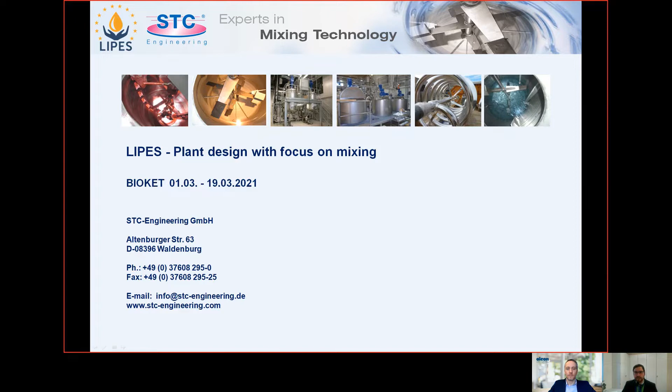My name is Patrick Jobst. As Jan told you before, I'm a project engineer from STC Engineering based in Germany. In this presentation, I will show you what we as STC Engineering do during the LIPES project. Our main focus was the design of the demonstration plant, and we were part of the people who were responsible for the general plant and equipment design. As specialists for mixing equipment, we are focused on the development of the necessary mixing equipment during the project.

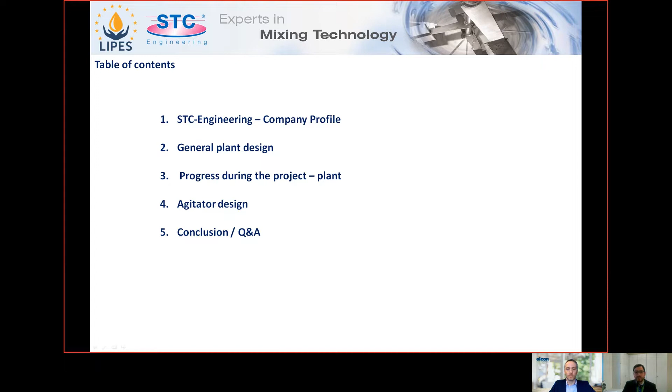So the table of contents for my presentation: in the first part, I will show you what STC does and what our specialties are. The second part is more or less the key part of the presentation. I will show some details about the general plant design. The third part of the presentation is a travel through the past of the project till the present status of the plant. I want to show you how we changed the character of the plant. In the last part, there are shown some parts of our ideas for the agitated systems in this project.

The STC Engineering GmbH and engineering company was founded in 1995. It exists as two companies. One is the engineering company. It was founded first, and later we founded the GmbH for the delivery of hardware because the customers wanted this from us. The central focus of the company is on mixing technology, and together with all employees, we have an experience of more than 30 years in mixing technology.

Our main field, where we are strong, is heavy mixing units and special agitators. And we are able to deliver the agitators for most mixing tasks worldwide. And we are also able to engineer and deliver customized skids and small plants. Here you can see it: the agitators, the vessels and reactors, mixing machines, and also package units.

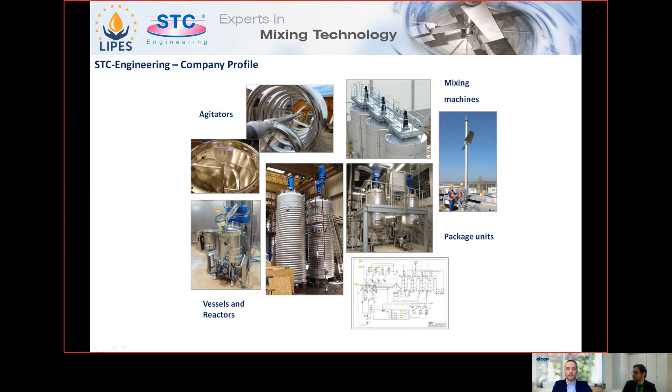For the LIPES project, our main part was the engineering. We have different fields in engineering, and one of them is construction and process design. For example, we can do the agitator design, the general plant design, mechanical design of vessels and agitators, or different design parts for plants, for example, piping and pumps. Another field is the risk analysis.

We are able to do vibration analysis with the finite element method, some load analysis, or for example, wear and tear analysis. We are also able to perform video animations, for example, to show the procedure of assembly and disassembly, do collision considerations, or do the visualization of stress and vibration. We are also able to elaborate technical documentation, for example, for the ATEX or the CE conformity certificate. Together with partners worldwide, we are also able to provide certificates for worldwide application and standards.

The last point is that we can do some tests. We are able to perform tests in our own small laboratory setup, or, depending on the project, together with partners, for example, the University of Applied Science in Köthen, Anhalt, Germany. The tests that we can perform are, for example, performance tests or mixing time tests, or tests to determine the perfect impeller selection, for example, for applications in stirring of solids or dissolving. That's not the only part of our service, but that's the most relevant part.

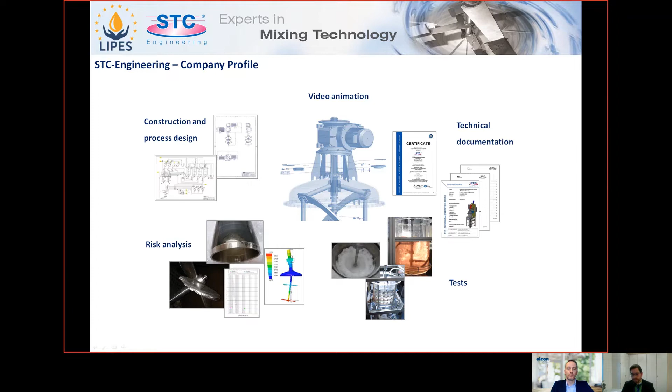So after that, I will come to the general plant design. The picture you see is not the status at the beginning of the project. It is more or less the final plant design, except the latest changes. We designed the plant together with our partner Oleon according to the basic requirements of the process. We use the existing small plant to show how the process works. To extend the place for the plant, we used an area outside of the plant building to integrate a storage area. You see it here.

The storage area is for handling the whole process in this one-reactor plant design to guarantee a 24-hour process for demonstration. The membrane unit here is for separating the enzymes after processing from fluids inside the process. The enzyme preparation is for generating a solution with the enzymes to transfer them through the process. You see it here in this corner. And the main demonstration reactor here, with a size of approximately 4,000 liters, is the heart of the plant. The enzymatic process takes place in this reactor and generates the product. There is a central piping route between main reactor and storage area to guarantee the necessary flow of all equipment, here at the back. In the next slides, I will show some details of the plant.

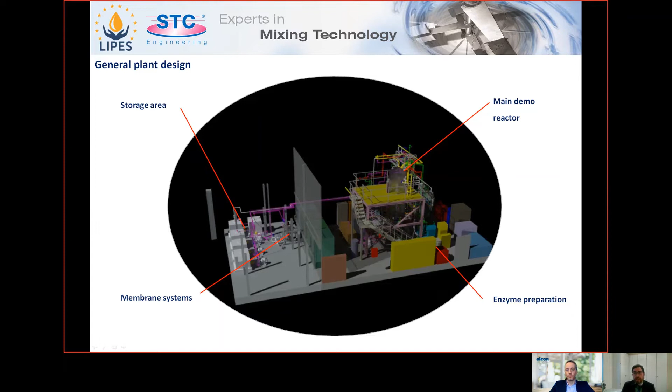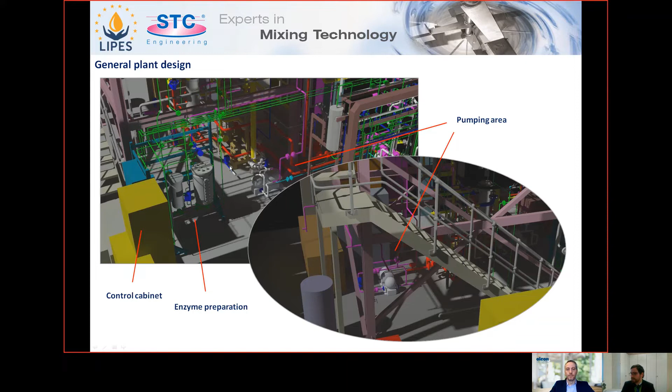The pumping area below the main reactor is for guaranteeing the transfer between main reactor and storage area. The transfer between enzyme preparation vessel and main reactor will be performed by pressurized air. The difficulty for this step was the integration of the equipment into the existing plant to guarantee that the space for the equipment is enough. See it here, here, and here, the enzyme preparation pot.

The storage area manages the main fluids of the plant and provides the input for the main reactor. Additionally, the output of the reactor will be stored here and can be transported easily to the next process steps at the other partners for the plant. Also, the membrane unit is placed at the storage area due to the limited space in the existing building.

The membrane unit owns one of the main topics of the process, to guarantee the recycling of the enzymes and to use these enzymes again for the process. The membrane unit is able to have an internal circulation loop or to be part of the circulation from the whole plant. Here you see the membrane unit, here the storage tanks and the pumping skids, and here the piping route into the main building.

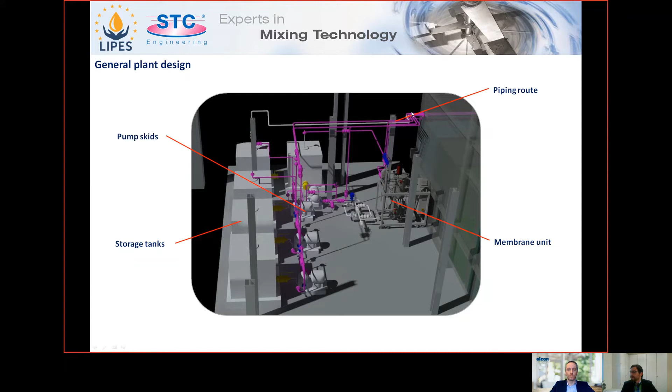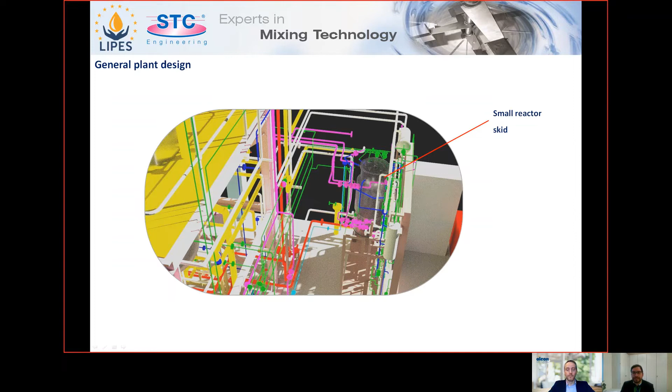This reactor is also integrated in the whole plant and it's able to communicate with the storage area as well as the membrane unit and the enzyme preparation vessel. This was in general a short plant design description which shows the idea of the demonstration plant and a 3D model which shows how it has to look in reality. Now I want to show you the way from the existing plant to the plant it should be, or more precisely is now.

We have started our LIPES project with the idea to use an existing fabrication plant with a fermentation reactor as key equipment as basis for the demonstration plant. The plant location is Venette in the north of Paris in France. Here you see the existing key equipment. It was a 4,000 liter main reactor, a 200-liter reactor skid, and a skid with a 50-liter agitated vessel.

The reality was that the plant was very old and some adjustments were done during all the time. We didn't have any information of the current plant layout or function. And so at first we had to create documents and drawings about the existing plant to understand what is possible. This understanding was mandatory for all first steps. We had to know which function each pipe has and which pipe we can maybe use for our LIPES process. That was a difficult part, which needed a lot of time.

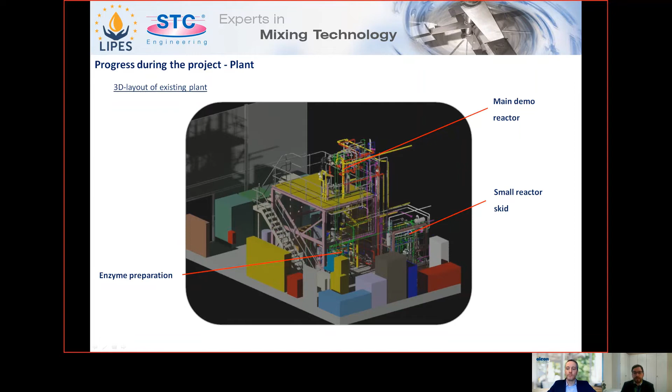The result of this was on the one hand this 3D model, and on the other hand a piping and instrumentation diagram of the existing plant. Based on this information, we are able to start our work to design the new demonstration plant. In the following slides, I will show some pictures of the 3D model compared with the reality of the existing plant. On this picture, you see the main reactor of the existing plant.

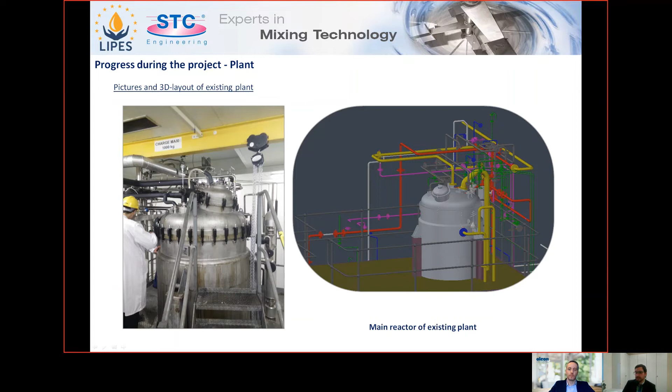This reactor will be the heart of the LIPES demonstration plant and has been adapted for the LIPES project. We need some special equipment inside the tank for the LIPES project, and also the drive unit needed an update. This picture shows the 200 liter smaller reactor, which is important for the process development of the LIPES process. You see it here.

It was difficult at the beginning to understand this cryptic bunch of piping, but with the background that it is a fermentation reactor, we realized fast that this piping is for supplying the fermentation reactor with clean air and for supporting the heating jacket with hot or cold water. So at the end, it was easy to understand this part of the plant.

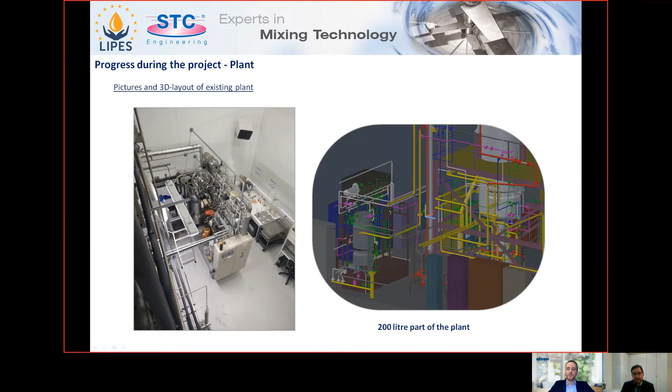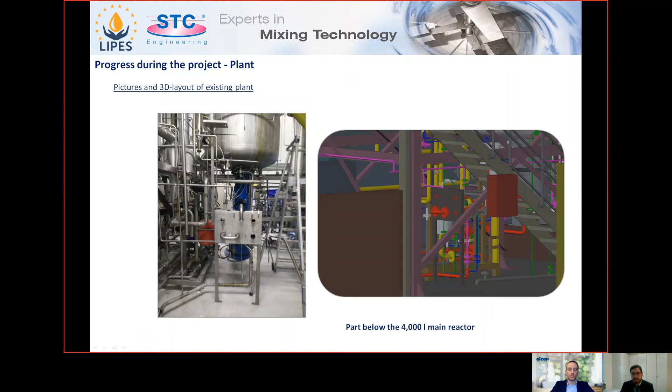This is part of the lower area of the plant, directly under the 4000 liter main reactor. It includes also the system for heating and cooling of the reactor. Check it, and you can see the drive unit of the bottom entry agitator here. There is also the possibility to connect different piping to the plant with this piping rack. On the next slide, I will start to show what we changed at the plant to become the final demonstration plant.

The main work on the erection of the demonstration plant was the storage area. We had to perform a lot of civil work to guarantee that we have a suitable roof and floor to install the storage area. You can see on the pictures the different storage vessels. We use standard IBCs for that.

Also, you can see the pumping stations which perform the flow between the different stations of the plant. We designed each pumping station very similar to the others to simplify the plant direction. Also, a lot of piping work was done during the installation of the storage area. Here you see the pumping stations, for example.

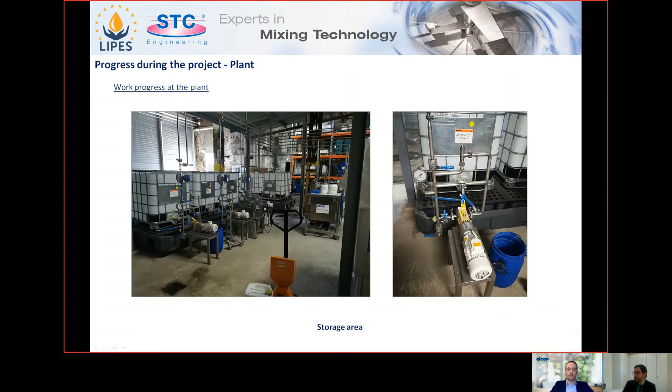Additionally, we installed a new membrane unit as one of the key equipment of the plant at the storage area. This unit is a complete pre-installed unit which was delivered by a specialized partner for this project. It was developed according to a large amount of tests to gain the best possible performance for the project.

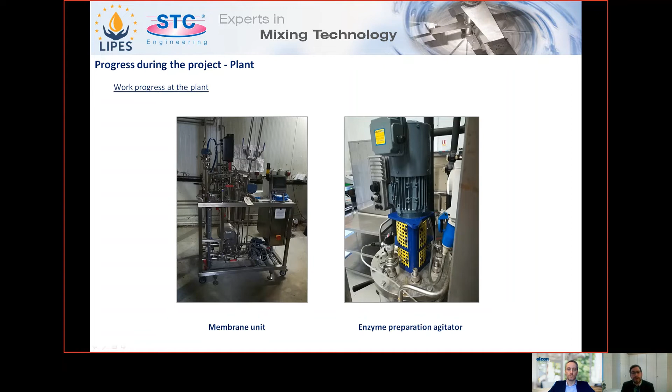You see it here. On the right side, the new agitator for the enzyme solution preparation vessel is shown. The existing one was an old vibration mixer, which was not in best state and not suitable to prepare the enzyme solution. Inside the plant building, we have included 2 pump skids, which transfer the fluid to the storage area.

These skids have been erected between all the existing equipment of the plant. The pumps are designed for a wide range of products because the LIPES project process is based on different input products.

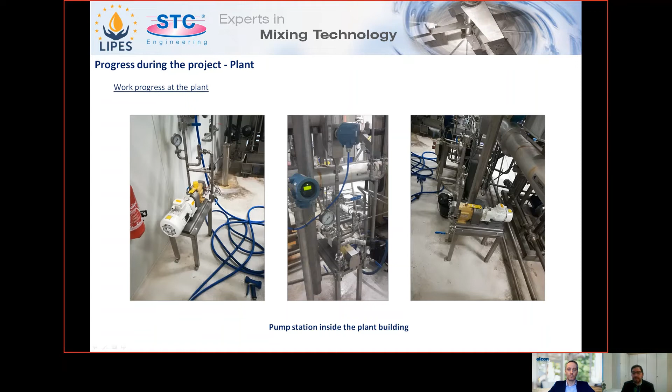During the project, the storage area was extended due to capacity reasons. This happened during the pilot process development with the 200 liter smaller reactor. We also needed a special vessel for one central process step because a standard IBC wasn't suitable for this application.

Also, the membrane system was tested with the product of the smaller reactor. Here you see the special vessel and also the membrane unit.

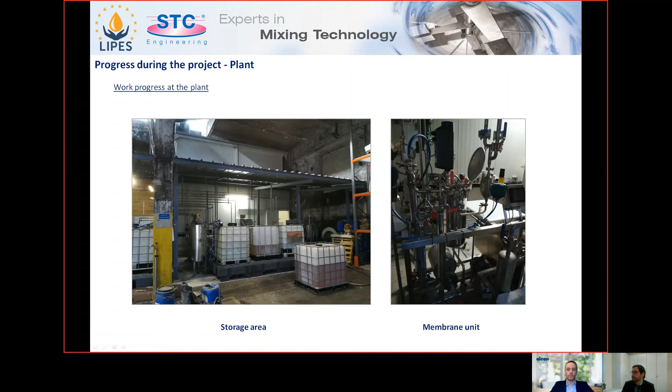On these pictures, you see the piping work we have done. It was very difficult to install the new piping because there was a lot of existing piping work. Due to the good preparation of this work with the 3D model and the design work, it was in the end not the biggest issue we had.

Additional to the new equipment and piping, we installed a complete new control system which allows us to have perfect control of the process and to know at each time what happens inside the process. For this, we have installed also a lot of measurement equipment. Here you see the piping and the part of the control unit.

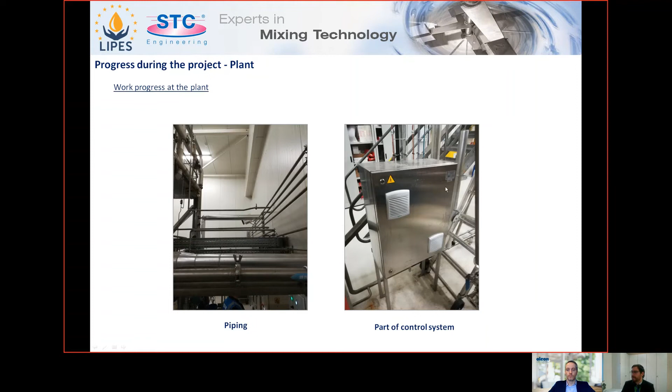When we switched the process from pilot stage to demonstration stage, we saw that the amount of one IBC isn't enough in our storage area for a full day process. So we decided to extend the storage area so that we are able to show that the process works also in a longer time frame.

We rebuilt the storage area and added also some civil structures. You see it here, the complete new build storage area.

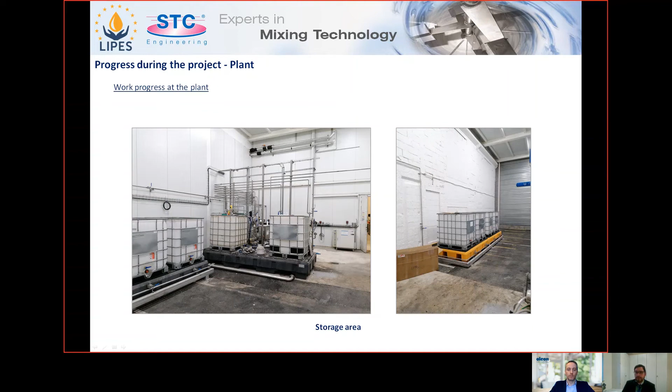Now I'm coming to the last point, referring to the progress during the project. Here, the current status of the plant is shown. You see that we have finalized the rebuild of the storage area.

We added, for easier handling of the product, a weight station for the initial filling of the reactor. All other components of the plant stay in the same way as shown before. Here, a perspective of the actual main reactor is shown.

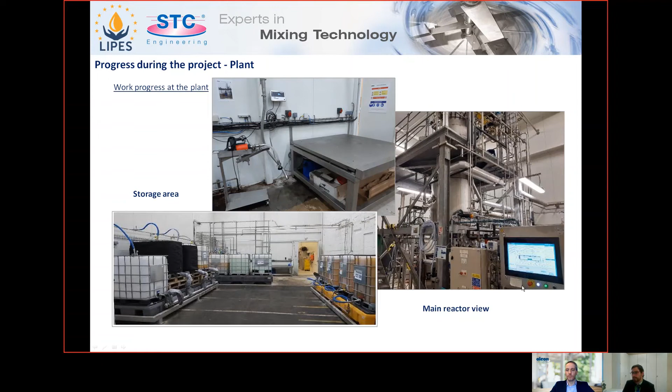Now, for the last step of the LIPES project, a stable production process on the demonstration plant, we are perfectly in line with the requirements, and there's hopefully no need for adaptation of any other part of the plant. You see additionally on this picture, I forgot to say, the control panel of the whole plant. See it here. On the next page, we come to the last part of this presentation.

In this last part of the presentation, I want to show you some aspects we thought about in this project due to agitated systems. You see in the graphic that we have a very large range of scale-up work in this project. What we are not showing is the next step after the LIPES process, the development of a production unit which uses the process of the LIPES project.

After that, we built together with our partner Oleon a 5 liter scale laboratory plant to see if the process will work in principle. That was the preparation for the LIPES project. Inside the LIPES project, the first step was a 13 liter scale.

For this scale, it was a topic to bring the requirements we had based on the 5 liter scale together with the existing equipment we have for the larger scale. The main issue for this was a geometrical issue.

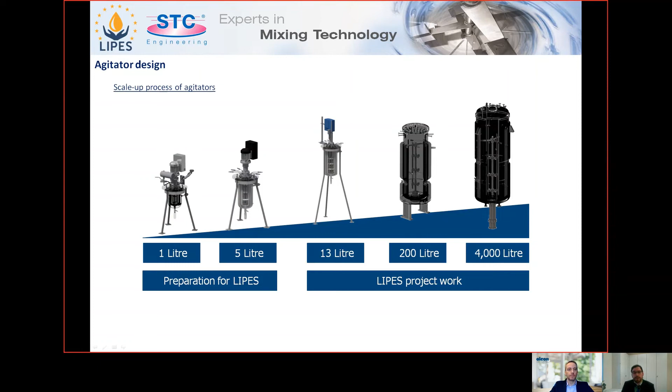The last two steps belonging to the scale up in the LIPES project were the 200 liter and 4000 liter scale, which I presented before during the principal plant layout presentation.

An important issue for the layout of an agitator is the correct impeller. The impeller influences the performance of the agitator. So we thought about what will be the best possible impeller for the LIPES project.

We have checked all the possibilities that are relevant for the process in the LIPES project. On this page is shown some of the possible impellers. In principle, the impeller can be split into three groups.

The tangential one with an anchor or, for example, helical ribbon. The radial one, for example, with a Rushton turbine. And the axial one with, for example, a pitch blade turbine, a standard propeller, or other ones.

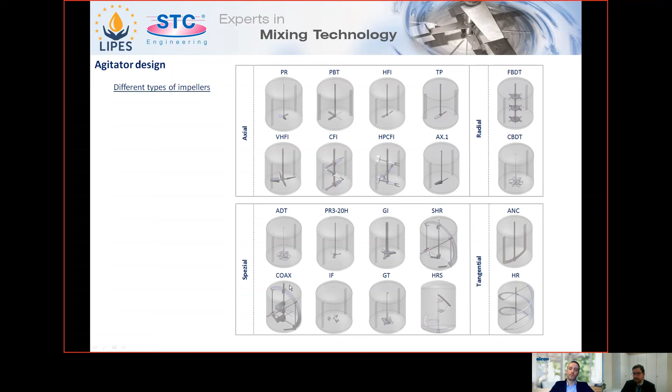There are some very special impellers which can possibly be integrated into one of these groups, but they are not very common, so we separate them in our overview. These are something like a coaxial impeller or a gassing impeller.

At the end of this process, we decided that we will test at least 3 different impeller types for the LIPES project: the Rushton turbine as a radial type, the VHFI impeller as an axial type, and additionally the Maxblend impeller, a special designed impeller from Asia, to see how efficient it is for our process. At the end, we decided on the Rushton turbine, because a radial impeller seems to be the best option for the specific requirements of the LIPES process.

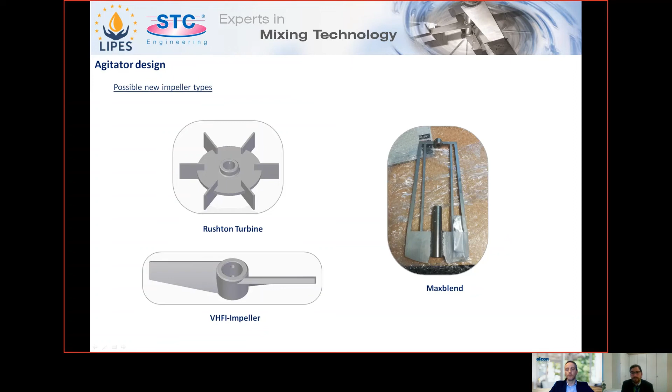Additionally, the Rushton turbine can be used as a multi-stage impeller, meaning we currently use 2 or 3 impellers in the reactors. This is not possible with the radial pumping Maxblend impeller. A minor reason was also that in the existing reactors of the plant, Rushton turbines are already installed.

Here you see the existing impeller types and sizes of the 2 reactors. With this configuration, we performed the LIPES pilot and demonstration trials. You see that there is a 3-stage Rushton turbine installed, and we already have baffles inside the vessel. A quite common installation.

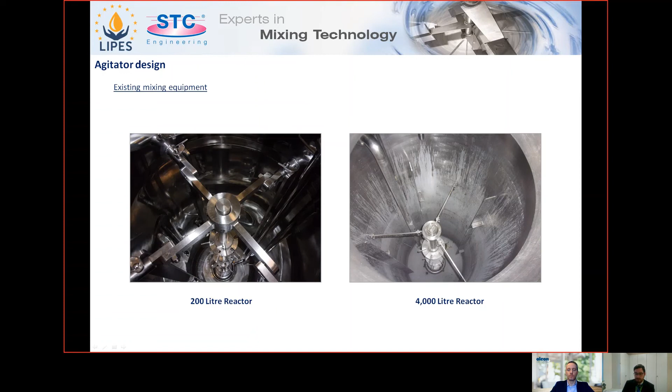A very special point of this project was the optimization of the flow inside the vessel. For a part of the project, we need to avoid the backflow between different product zones inside the vessel. For that application, we developed a special chamber system which can be used for that topic.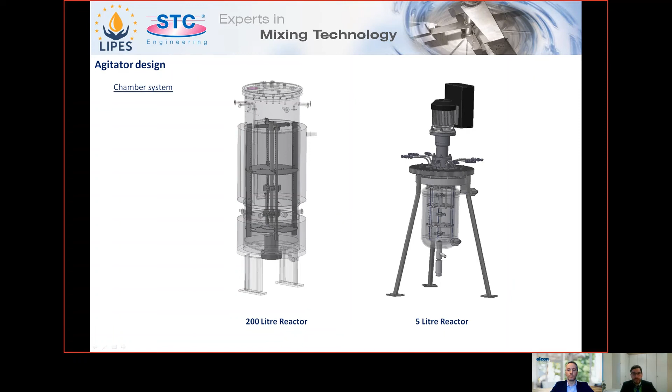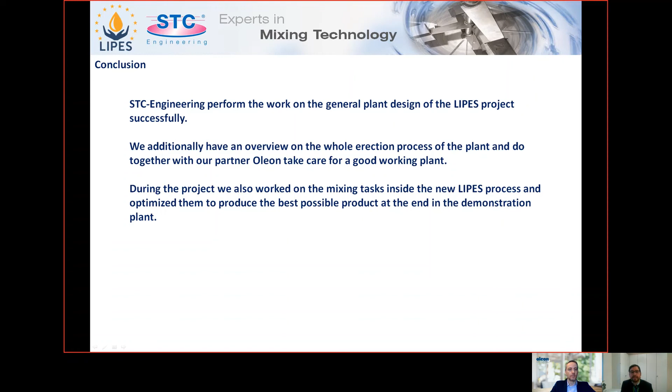At the end, I will come to the conclusion. STC Engineering performed the work on the general plant design of the LIPES project successfully. We additionally have an overview of the whole erection process of the plant and, together with our partner Oleon, take care for a good working plant. During the project, we also worked on the mixing tasks inside the new LIPES process and optimized them to produce the best possible product in the demonstration plants. Thank you very much for your attention. I hope this excursion through the plant design part of the LIPES project was a remarkable topic for you.

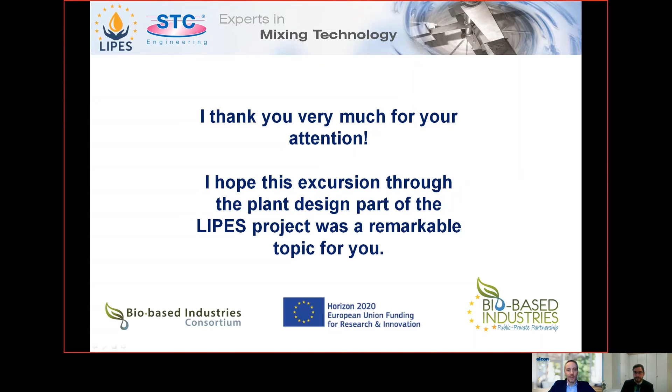The first one would be, what was, according to you, the biggest challenge that you met during the plant design of the LIPES project? I think the whole project was a big challenge and a complete new kind of work for STC. We have never worked before on such a big project with partners all over Europe. It was an issue for us also to design the new plant based on the existing plant in France without any correct documents. But as you can see, we mastered this challenge and elaborated a good basis for the demonstration plant.

Okay, and so more generally, could you give us a bit more detail about the kind of services or analysis that STC can offer in typical projects?

We are able to offer a wide range of possible analyses. I think our main part in this field of engineering is FEM, the finite element method analysis, to analyze the mechanical strength of constructions we design. It's also possible to evaluate the vibration of a system we design. For us, it is most important to see how an agitator vibrates together with a vessel as a unit. That is sometimes very interesting when you see small changes, for example exchanging a flat gearbox into a pivot gearbox, have a quite big impact on the vibration aspects.